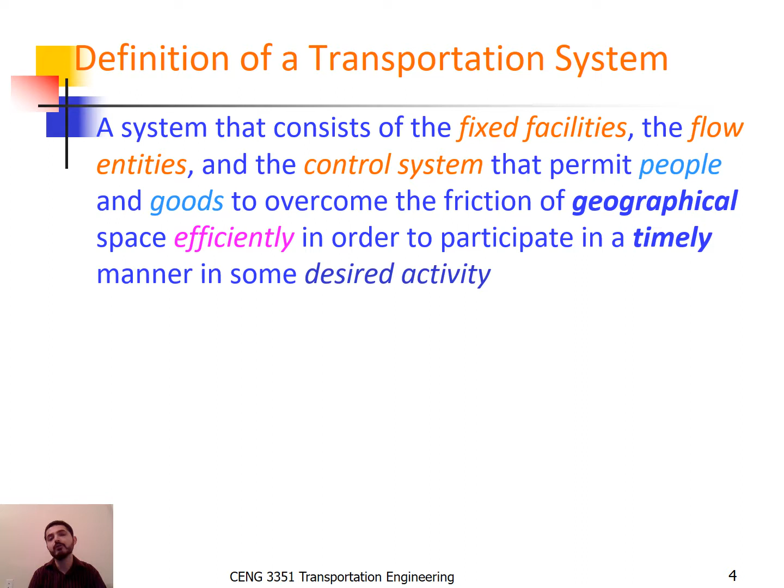Now we will discuss the system functional components. In any transportation system, there are several components. As we said, the first one is the fixed facilities. So fixed facilities include transportation networks. They can be physical or virtual, and they contain both links and nodes. So the links are the roadway segments themselves. They can be the railroad or railway track. They can be pipelines if we're transporting gas or liquids. They can be flights. They can be fiber optics.

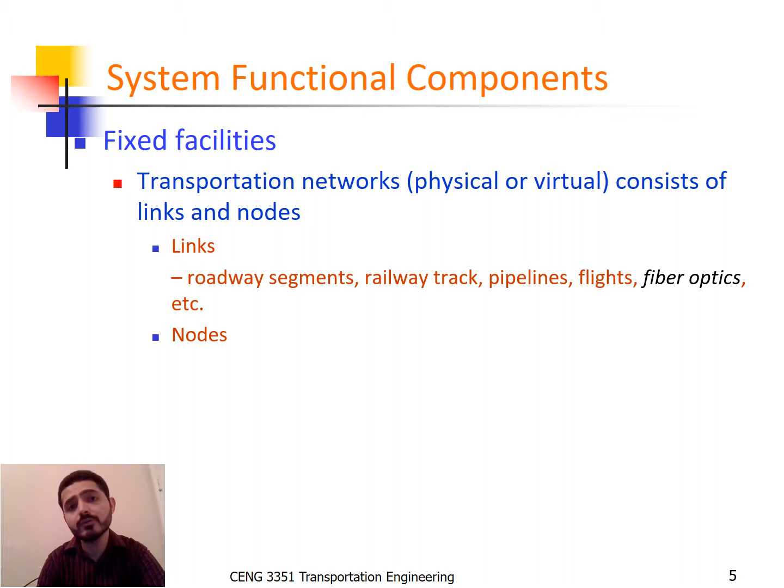When it comes to the nodes for any transportation system, those include intersections, bus terminals, airports, harbors, warehouses, interchanges, even routers. So again, that's what I mean by fixed facility. So for example, if I leave from here to another city, I will go through some nodes, which are intersections or bus terminals. And then once I leave the bus terminal or the intersection, I will be using the link, which is a long segment or a long highway to get me from city A to city B.

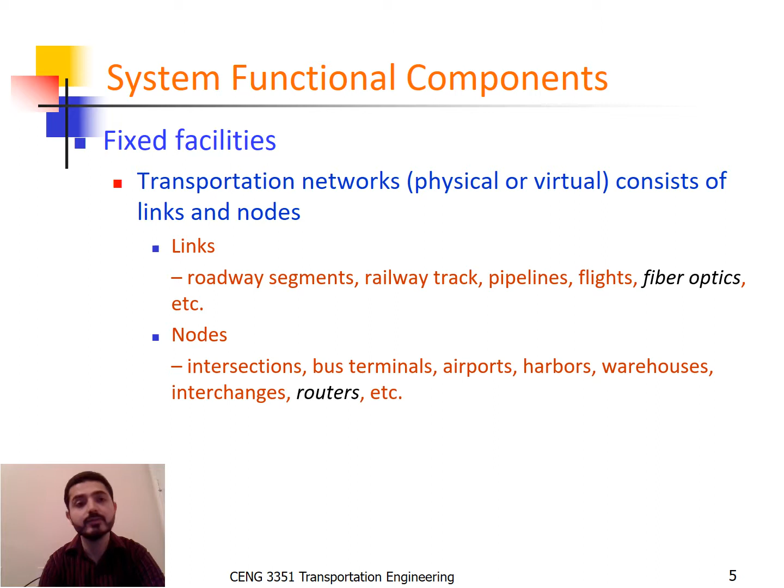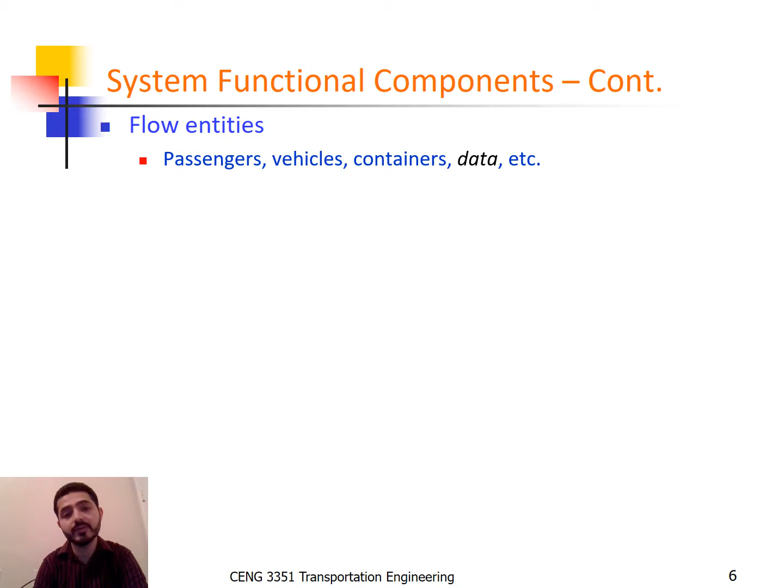Another component of any transportation system is the flow entities. Who are we transporting? As we said before, we're mainly transporting passengers, vehicles, containers, or even data from point A to point B. That is transportation.

When it comes to passengers, one of the most fascinating aspects in transportation engineering is that we deal with the human factor. With all respect to the other areas in civil engineering, such as structural or environmental, we don't deal much with human factors. But in transportation engineering, we deal a lot with human factors. The operators' physical and psychological activity, the driver, that's a big factor.

And how the drivers are interacting with each other, and how they are interacting with fixed facilities during operation. So when I say fixed facilities again, how are the drivers dealing with a traffic signal, a marking, or a warning sign? That's an important aspect that we need to include in our calculations when we design a transportation system.

It also includes travel behavior. So travel behavior, which is again how we react to traffic control devices. For example, as I said before, pavement marking, the visibility under different colors, size, shape, and weather conditions. So that would make a difference if I'm driving, and from person number one to person number two, how are they dealing with the pavement marking, the color of it, the size, the shape.

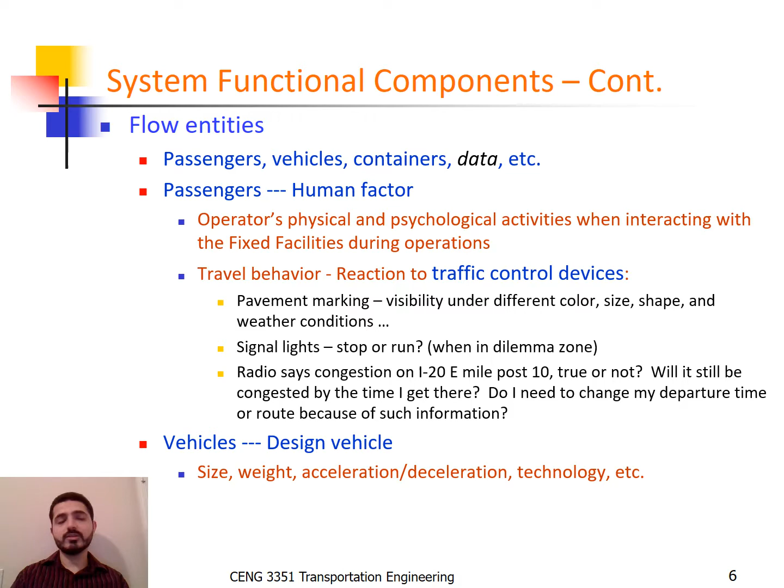How about vehicles? Vehicles are another component that we need to know a lot about when we design our transportation system. So vehicles, it depends on the size, the weight, the properties of that vehicle when it comes to acceleration versus deceleration. If I'm a traffic engineer, I am dealing with a wide spectrum of vehicle performances, and I need to make sure that I am handling all those extremes, from old cars that do not have some of the safety features, all the way to up-to-date cars that have all we need for a safe transportation system.

Another component for any traffic and transportation system is the control system itself. So I can have the entities, which are people and goods. I need to know about the vehicles, but also about the control system. How do we control traffic movements? First of all, you need to know how I can control the vehicle. That applies to individual vehicles, but I also need flow control, the overall flow. So if I'm talking about a queue of cars or streams of vehicles, that will apply to all vehicles. So we need to understand as traffic engineers the mechanism to guide the flow entities to efficiently and safely traverse through the fixed facilities.

There are some mandatory flow control devices, and some of them are advisory. The mandatory ones have to be visible. You can see them easily, and those are traffic control devices. They have three levels. The first level is intersection signals, traffic signs, or pavement markings. The other level, if I don't have signals, would be the stop sign or yield sign, and the third level would be where there's nothing there. If the traffic is not that much, you don't need traffic control devices. Other mandatory traffic control devices include air traffic control or toll booths.

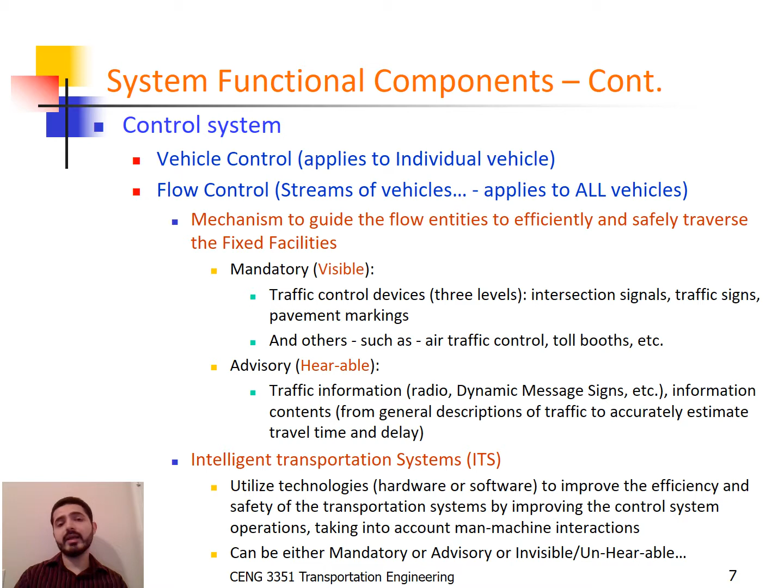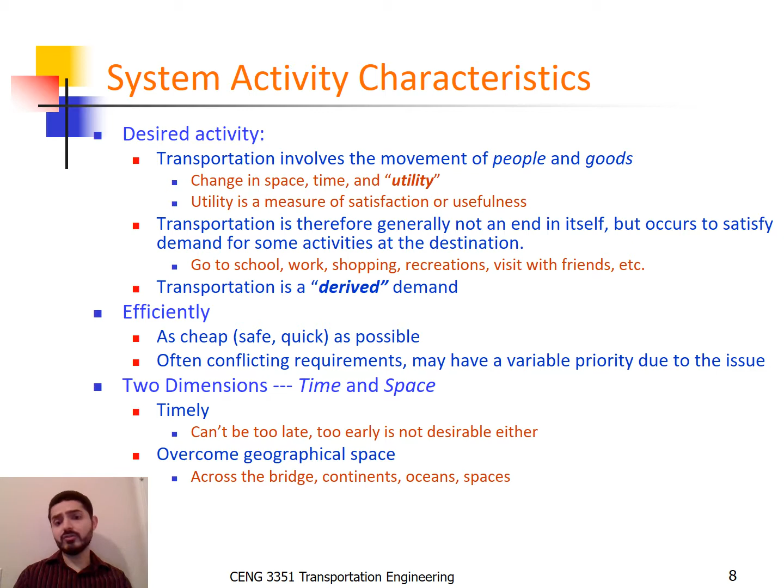Also, when it comes to space, you have to overcome geographical spaces. If you're designing a transportation facility from point A to point B, you need to make sure that you'll be able to handle all the geographical changes, including different elevations, horizontal alignments and vertical alignments that we will cover later on in the course. You may need to cross a bridge, continents, or even oceans. So these are some of the characteristics of transportation systems.

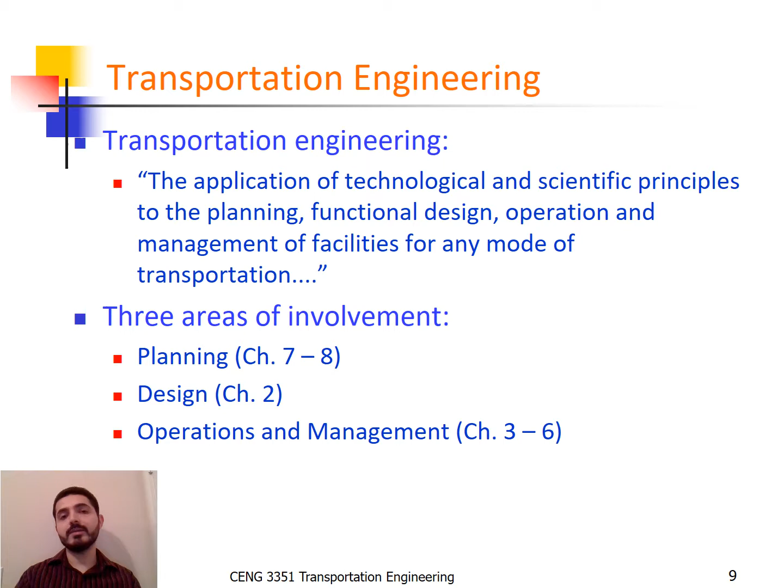Now let's shift gears. What do I mean by transportation engineering? Transportation engineering is the application of technological and scientific principles to the planning, functional design, operation, and management of the facilities for any mode of transportation. There are three areas of involvement in transportation engineering. We will be covering planning, in chapters 7 and 8, design of a transportation system, in chapter 2, and a big portion of this class will be operation and management, covered in chapters 3 to 6.

So let's talk about the first aspect of transportation engineering, which is planning. The planning aspects of transportation engineering relate to urban planning and involve technical forecasting decisions and more difficult political factors. So planning is not an easy task. Your goal as a traffic engineer, if you decide that planning is your niche, is to predict and forecast what's going to happen in the future, how much demand you expect to see on those highways, and this is also going to affect lots of political factors and political decisions.

Technical forecasting of urban passenger travel presently involves what is called the four steps. There are four steps when it comes to predicting and planning any transportation system. The first one is trip generation. You need to ask yourself how many trips and for what purpose? How many trips are people going to take from Tyler to Dallas per day, per week, per year? And what are the reasons for people to move from Tyler to Dallas and back? The next step in any planning process is trip distribution. What does that mean?

Well, that means destination choice. Where are people going? Where are people heading from point A to point B? The third step is the mode choice, which means again what mode is being taken. Mode choice, that means again you can travel by your own vehicle. People sometimes may take a bus, they may bike if they are within the city, for example from the campus to their apartments. Students may take a bike. So again, you need to know what are the modes of transportation available for the public.

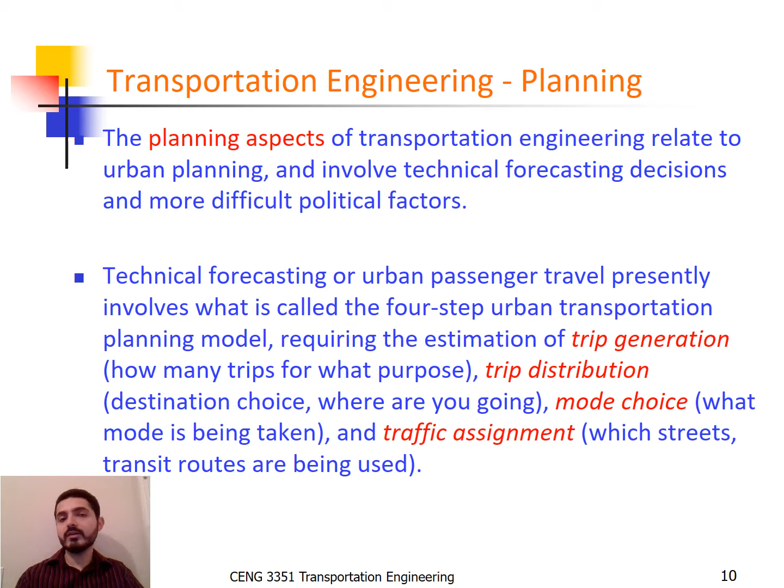Travel demand forecasting, related facts to it: in 1962, the Federal Highway Act was established, and at that time, this act required that all cities with population more than 50,000 people must have a comprehensive long-term transportation plan, and that plan should be continually updated every few years. So why is that? Because again, people are growing. So for example, our city is much more than 50,000 people, so we do have transportation planning.

And typically each metropolitan planning organization, which is the MPO, is required to prepare a long-range plan or transportation plan, typically for the next 20 years, and a transportation improvement program, and that is updated at least every 2 years. And the city of Tyler has their own MPO, and I recommend you go to the website cityoftyler.org and look for the Tyler Metropolitan Planning Organization. They do meet and they have public meetings, and you're more than welcome to attend those.

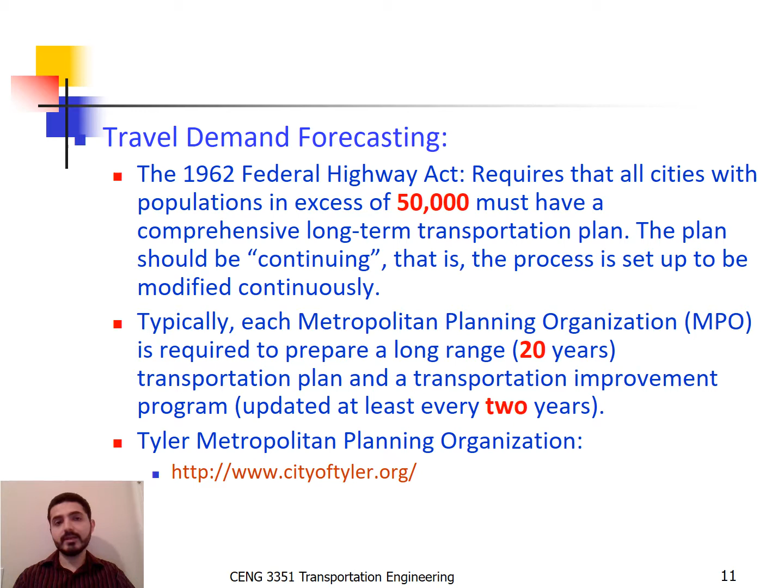But as I said, this MPO for every city that is more than 50,000 people has to meet regularly to come up with a transportation improvement program every 2 years and a long-range transportation plan for the city for the next 20 years. As I said before, forecasting is not an easy task.

And here I'm bringing two quotes that I heard before. The first one is: we have two classes of forecasters, those who do not know and those who do not know that they don't know. So again, it's a very interesting fact, but that's actually what it is. So you need to be careful which category you're going to be under.

The next forecasting quote is from Allan Kirson from Motorola. He said, trucks of the future will have only a man, a dog, and a computer on board. The computer will be there to control the truck. The man will be there to watch the gauges, and the dog will be there to bite the man if he attempts to touch anything.

And again, this quote was 5 years ago, and now we can see that there are lots of driverless cars and autonomous vehicles and connected vehicles that don't need you as a driver. You just have to be there and watch the gauges, and it's coming. And that forecast is becoming a reality in our daytime.

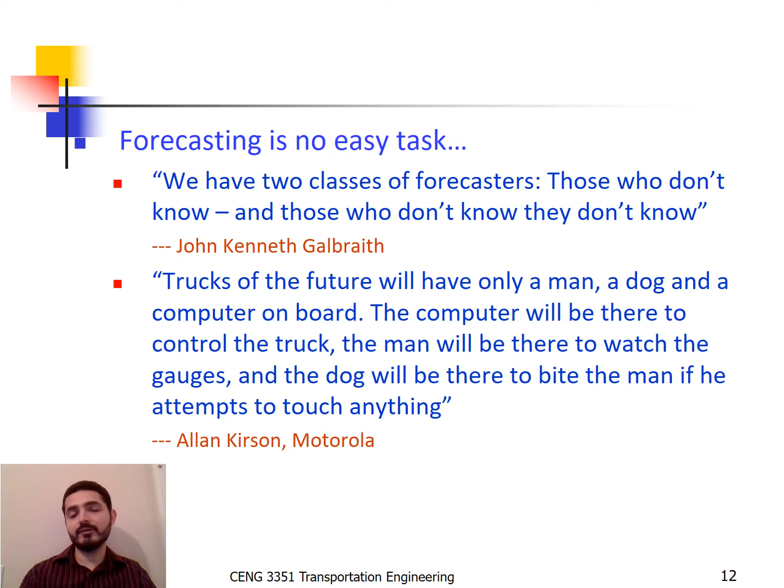Some of you will be interested in being a transportation engineer, but in the design area rather than planning. The design aspect of transportation engineering includes the following. First, the sizing of transportation facilities. For example, how many lanes per direction am I going to be designing this highway for? What's the capacity of that facility? How many vehicles do I need to handle per hour or per day or per year?

You also need to determine the materials and thickness used in the pavement. We're going to be covering this in the last third of the semester, in pavement engineering. We all drive on highways or streets, but we need to know now as transportation engineers how many layers I need to pave, what's the thickness for each layer, and what's the characteristics for each one of those layers.

As a transportation designer, you will also be designing the geometry, the vertical and horizontal alignments of the roadways, and there will be a big chapter in this course to cover that. So all these are elements under transportation engineering, the design aspect.

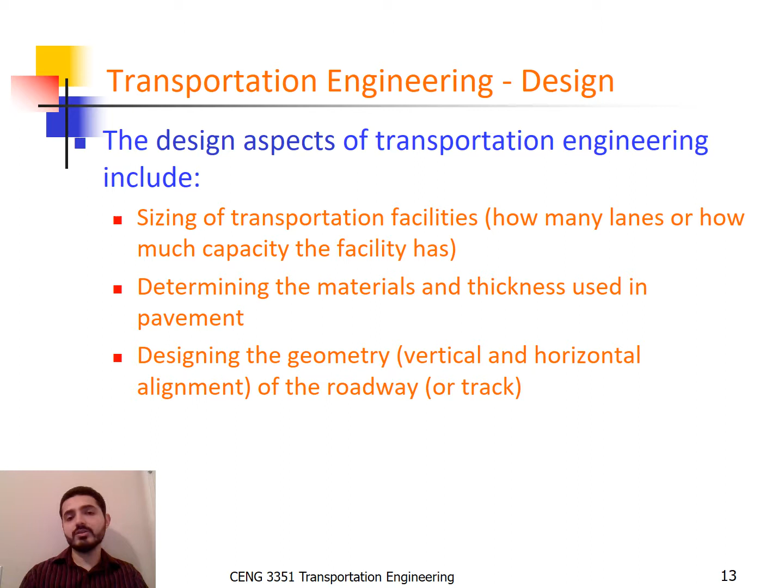When it comes to road design, we said there is geometric road design. Under geometric road design there is highway engineering. You need to design the grade, how steep the roadway is, whether it's going uphill or downhill, and the surface texture. Is it too smooth, which is very dangerous in rainy and icy conditions? Is the surface too rough? That means it's going to affect the vehicle and it will have a higher fuel consumption.

So as a traffic engineer or transportation engineer, you need to gauge that and have an optimal surface texture. The sight distance: how much distance do I have in front of me as a driver once I see a danger?

So that also is important. If I have enough distance, I'll be able to hit the brake, react fast, and avoid an accident. If there is not much sight distance, an accident may happen. Also, you need to design the horizontal bends and vertical slopes. That's also important. The horizontal bends and slopes, again, will be covered in a full chapter in our class.

Design speed. What's the speed limit for this highway? 40 miles per hour, 75 miles per hour? That's a big factor. Also, the structural road design, as we said, we need to ensure that the road is strong enough in terms of thickness and the material that we're using to pave. It has to be strong enough to handle the expected number of vehicles for a certain number of years.

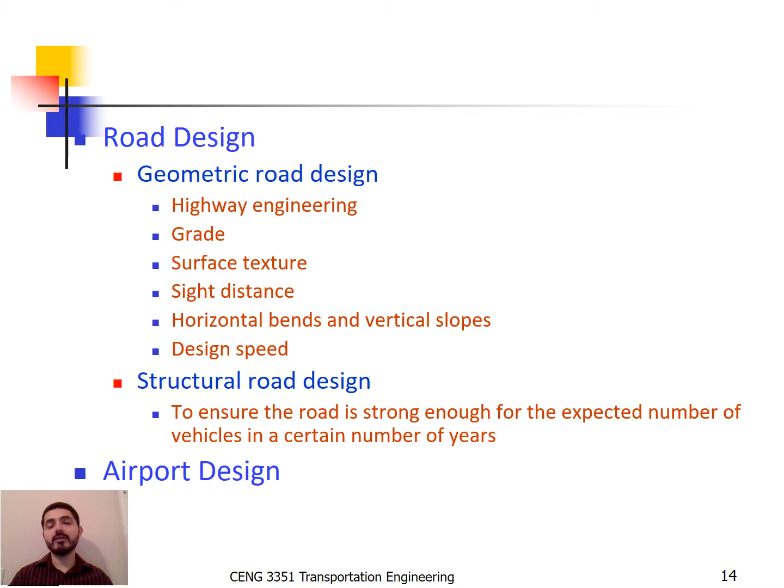Another aspect of transportation engineering is operations and management. So far we talked about planning, we talked about design. You can also deal with operations and management. Operation and management involve traffic engineering so that vehicles move smoothly on the road or the track. For example, older techniques to operate and manage transportation systems include signals, signs, markings, but now newer technology that talks to the drivers is, as we mentioned previously, the ITS, the Intelligent Transportation System techniques.

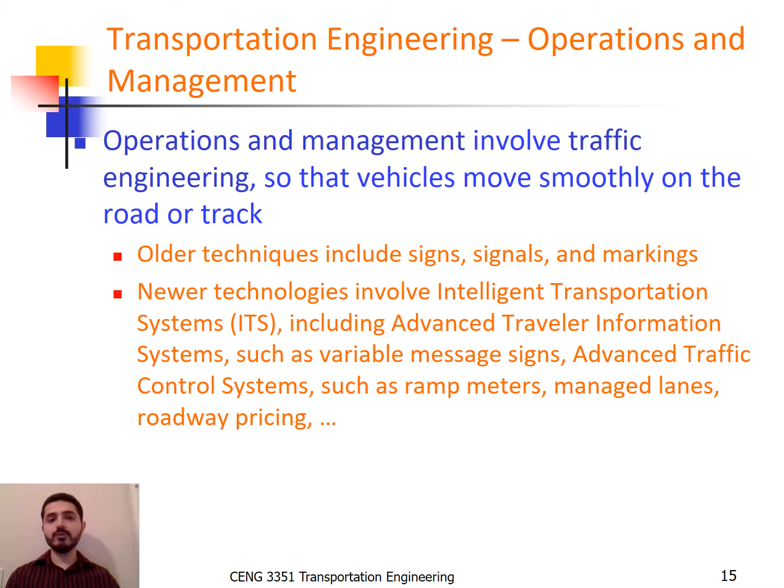You all use your Google Maps or Waze or Apple Maps. Those are other ways to give you directions, estimations of how long it's going to take you to get to your destination, if there is any traffic on your way, if there are any accidents. Again, those are some of the tools that are used to operate and manage traffic systems.

Transportation engineers, what's been done? What's the role of engineers when it comes to transportation? Civil engineers are just some of the large cast of characters with professional involvement in creating and running transportation. As I said before, as a transportation engineer, you'll be handling planning or design or operation. The professions involved are a lot. As a traffic and transportation planner, you will be dealing with economists, financial analysts, social scientists.

Same with design. You'll be dealing with people from hydrology, drainage, electrical engineering, mechanical engineering. Operations, you will be dealing with businesses, transportation systems administrations, economists. So expect that you will not be the only person to handle the whole transportation system. You will be dealing with engineers as well as non-engineering people, and you need to be prepared to have a good background and the knowledge of how to interact with others in a team that handles any transportation system.

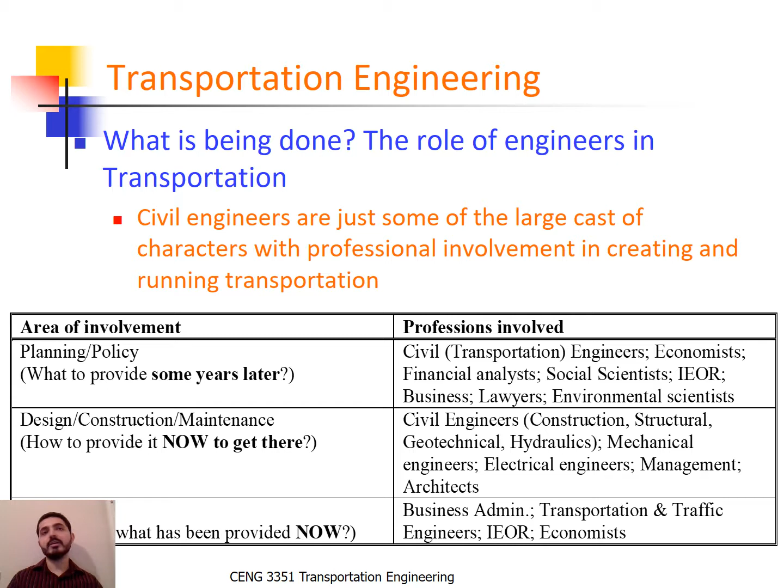When it comes to transportation engineering, how are we organized in the States? The majority of decisions on consumption and provision of transportation in the US is made by individuals and private concerns. The principal private providers of transportation are, of course, the trucking companies. Trucking companies have a big voice in transportation engineering and how it is managed. Railroads, airlines, pipeline companies, shipping companies, vehicle manufacturers, freight forwarders.

Other key agencies that you might be interested to know about are state and local public utilities, the Federal Interstate Commerce Commission, the Department of Homeland Security, and so many others, all the way to the end of the list, which is the MPOs, the Metropolitan Planning Organizations. The U.S. Department of Transportation was formed in 1967. This is the overall umbrella, if you will, that transportation engineering is under.

It has undergone several changes in its organizational structure. The Secretary of Transportation is a member of the U.S. President's Cabinet. So it's very important to know that the Department of Transportation's representative gets to meet with the president a lot and discuss things. The U.S. DOT currently contains the following operating administrations. One of them is the Federal Aviation Administration, FAA. Another one is the Federal Highway Administration, FHWA, as well as others.

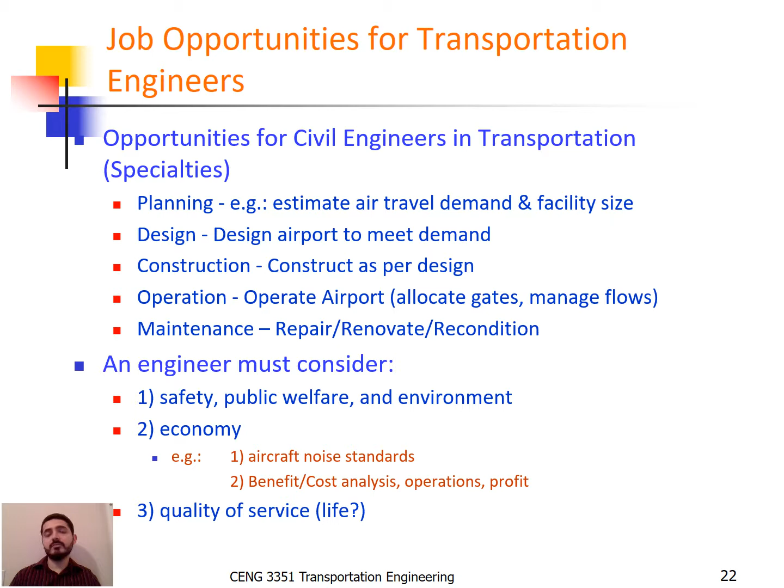For example, aircraft noise standards, something to consider. Benefits, cost, operations and profits, something also to think of. And eventually, quality of life, quality of service. How would you like to design your highway to be safe, economical, and a top-notch transportation facility that people would be happy to use? And of course, you need to assess your risks.

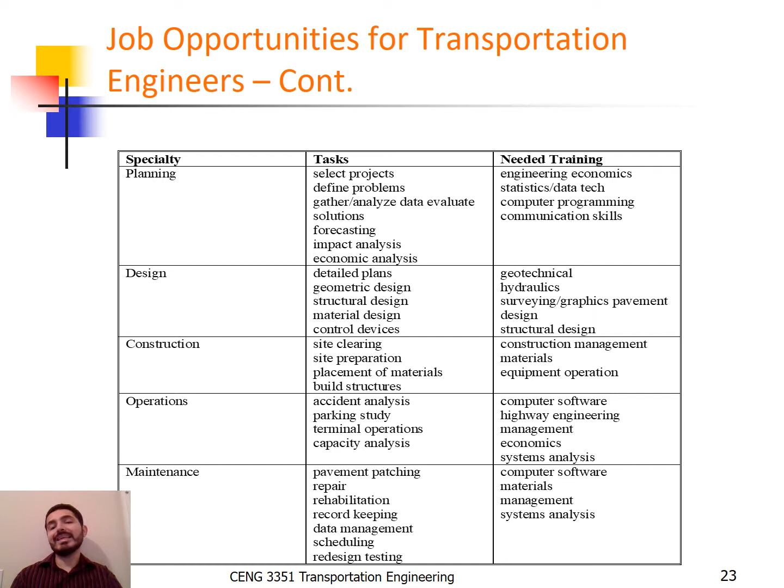This is just a picture of the tasks that you can be doing as a traffic engineer when it comes to planning, design, construction, operations, and maintenance, and the needed training besides, of course, the degree that you'll be obtaining here.

When it comes to job opportunities, if you decide to be a transportation engineer, 40% of transportation engineers end up working for the government, 50% as consultants in private companies, 5% in research or teaching like myself, and another 5% in rail or trucking firms.

Pay and perks, typically the starting salary can go as low as $45,000, which is not too bad. I think now it's been updated to 50 or 55, but you can get a six-digit salary depending on the position. So again, it's a good career. Another thing, producing tangible changes in society. You'll always feel that you have ownership, that you were a part of designing a highway or an airport.

The transportation engineering workforce in the United States is facing a shortage. Why? Because a lot of transportation engineers are retiring or getting close to retiring. So there is a big need for young, fresh transportation engineers. So 50% of the state transportation workforce will be eligible to retire within the next 10 years.